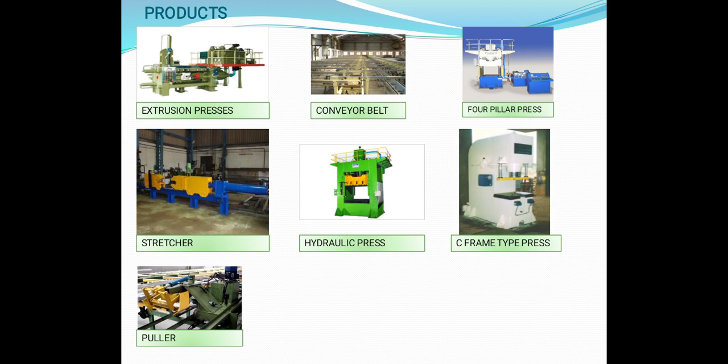Working departments: sales and marketing, purchase department, production department, store department, quality department, account department, design and draft department, planning department, material management department, and human resource department.

Sales and marketing: marketing is one of the most dynamic activities of the firm, with emphasis on quality, values, customer satisfaction, and relationship building along with ethical marketing behaviors. Marketing department is the main department in SPM Controls. Both marketing and sales departments are merged, and all the pre-sales activities are handled by this section.

Purchase department: the purchase department is directly responsible for the procurement of material like raw material, internal department requirements, packing material, size, stock verifications, quality requirements of department, placing orders against requirements, quotations, rates, quality, deliveries and quality of the material purchased.

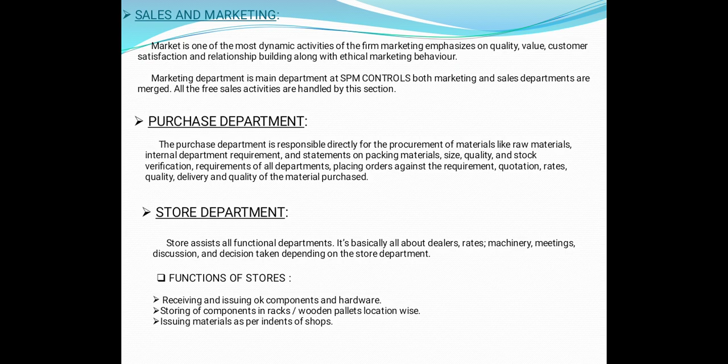Store department: store assists all functional departments, basically about dealers, rates, meetings, machineries, discussions, and decisions taken depending on the store department. The function of store: receiving and issuing components and hardware, storing of components in racks and wooden pallet locations, materials as per indents of shops.

Production department: in any manufacturing organization, the production department is the most important of all. The running of this department ensures the delivery of products to the customer. Production department has a well planned and equipped manufacturing setup where every infrastructure is available.

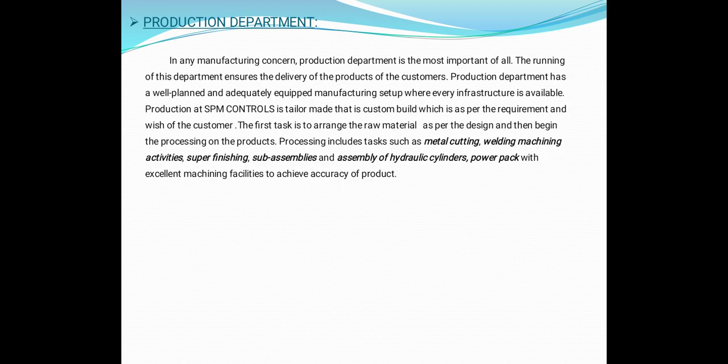Production at SPM Controls process includes tasks such as metal cutting, welding, machining activities, super finishing, sub-assemblies, and assembly of hydraulic cylinder, power pack, with excellent machining facilities to achieve accuracy of product.

This is a process chart. The process chart includes design department, raw material, fabrication, light machine shop, heavy machine shop, then quality assurance, assemblies, painting, testing, packing, dispatch.

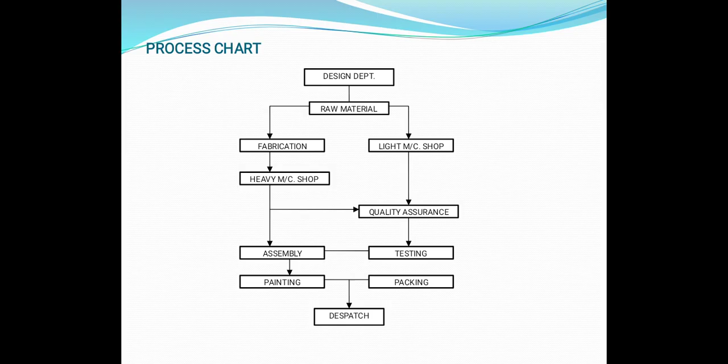Process: fabrication. Material fabrication is the creation of metal structures by cutting, bending, and assembly processes. It is a value added process involving the creation of machine parts and structures from various materials.

Welding is a fabrication process that joins materials, usually metals or thermoplastics, by using high heat to melt the parts together and allowing them to cool. There are different welding processes carried out at SPM Controls: arc welding, CO2 or MIG welding. The figure shows arc welding.

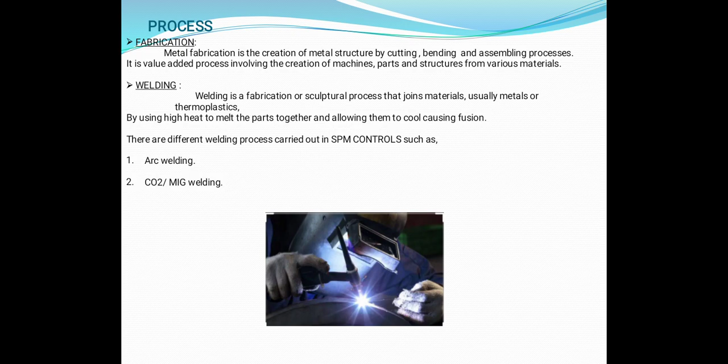Cutting: this is an important operation in producing sheets to size, removing waste material, making weld joint preparation, and removing defects. Cutting can be carried out using a number of techniques such as mechanical, hydraulic, and thermal. Two types of gas cutting machines used are semi-automatic and manual hand cutter torch.

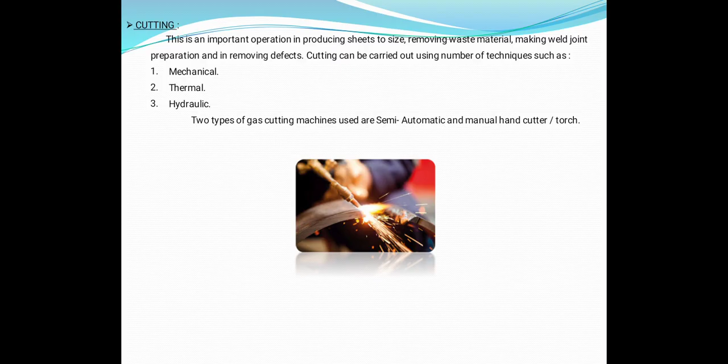Pipe bending. Pipe bending is a process where we first fit it on the machine vice, then heat it at the corner, and then bend it according to the requirement.

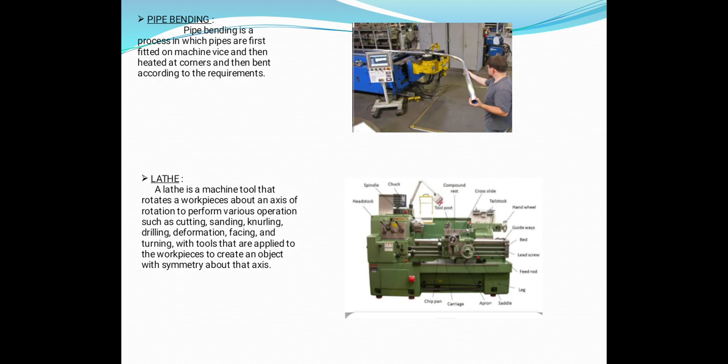This figure shows the lathe. A lathe is a machine tool that rotates a workpiece about an axis of rotation to perform various operations such as cutting, sanding, knurling, facing, turning, and drilling, with tools applied to the workpiece to create an object with symmetry about the axis.

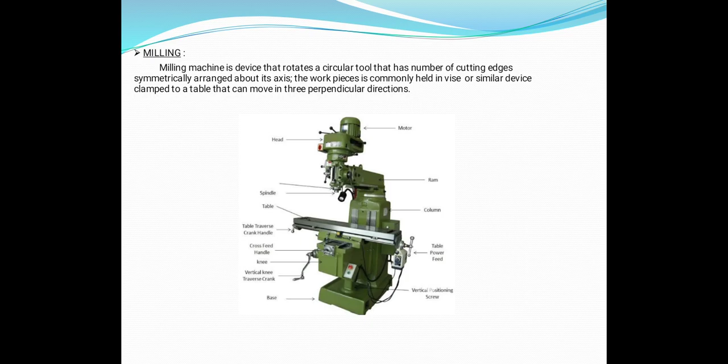Milling. A milling machine is a device that rotates a circular tool with a number of cutting edges symmetrically arranged about its axis. The workpiece is commonly held to a vise or similar clamp on a table that can be moved in three perpendicular directions. The figure shows the milling machine.